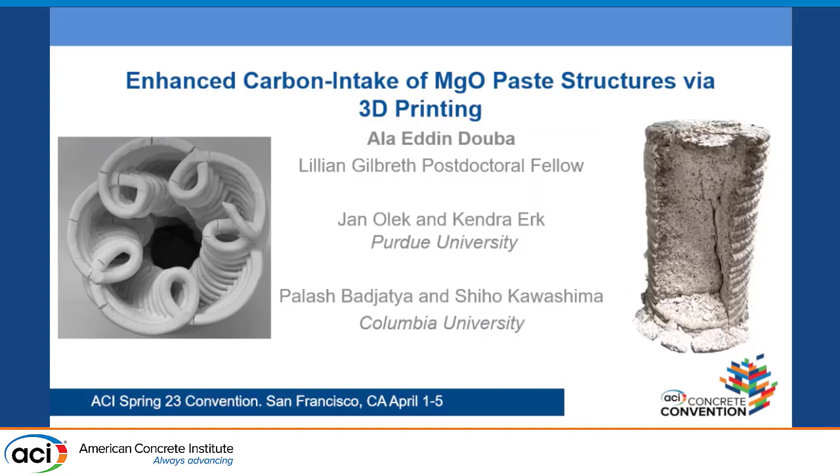So I'm presenting today some of my work at Columbia University. This is about enhancing carbon intake for magnesium oxide-based structures. Currently, I'm at Purdue University working with Dr. Kendra Erk and Dr. Olek. I just want to make sure that this is the work I did with Palash Badjatya and Shiho Kawashima.

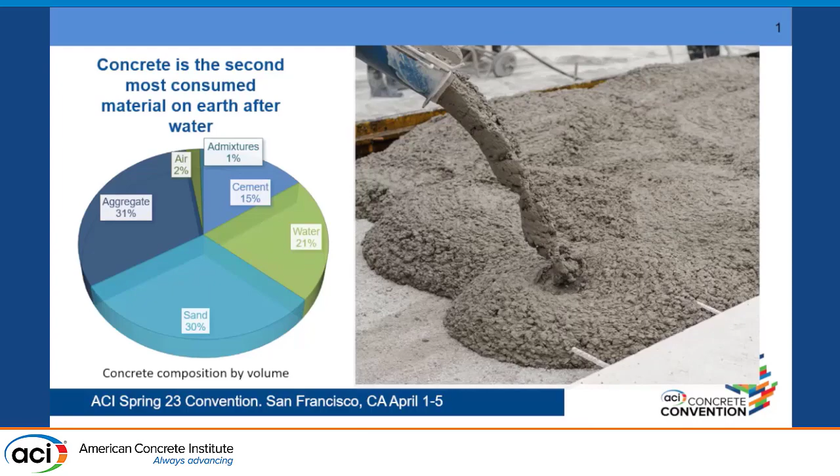So I think one of the reasons we're all here is because we know concrete is one of the most used materials on Earth after water, and because of it, it produces a lot of carbon dioxide. And if we actually dive deeper into where this carbon footprint of concrete comes from, we can see that almost the majority of it comes just from cement production. And of the cement production part, the main part comes from simply the decomposition of the carbonate phases inside cement.

And specifically, if you look at calcium carbonate, we would see that by itself, it's responsible for 33% of the CO2 emissions of concrete worldwide. And so if we are trying to reach the goal of carbon neutrality of concrete, we would have to at least put back all the carbon dioxide that we have produced by making our concrete. However, the best that we could do is put it back in and reach carbon neutrality.

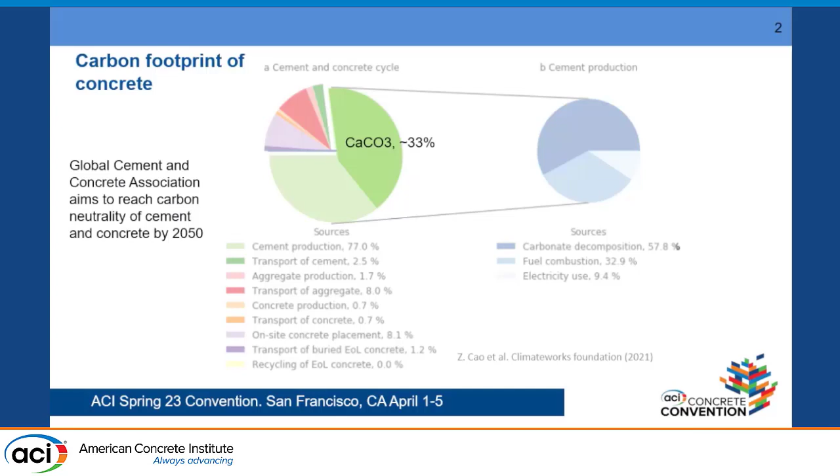So one of the questions that I wanted to answer is, can we go a step further? Can we start to talk about carbon negative concrete? And for that, we have to sort of forego the calcium base and look into another mineral. And that is where magnesia comes in. Now, magnesia or magnesium oxide is not novel. It's actually been used for 150 years at least. It's part of almost every cement batch. Typically, it's used at 1%, and in some large structures, we use it at 5%.

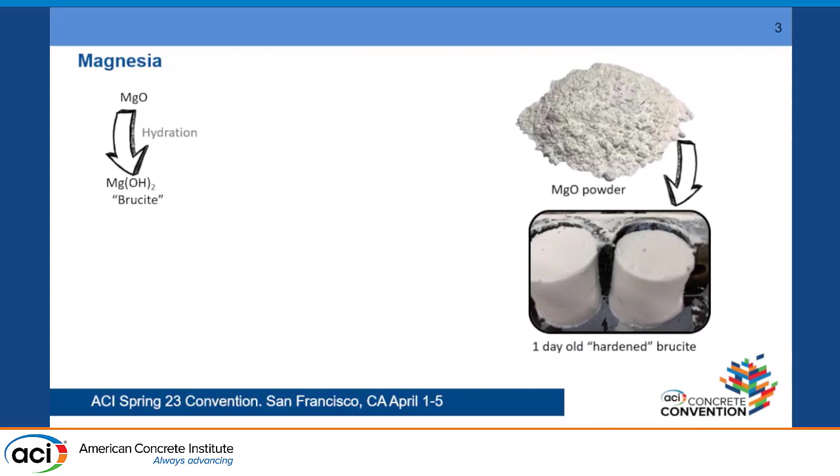However, we don't use it as the main binder, simply because it's weak. This is how it looks after you cast it for 1 day. This is technically hardened, and it can barely sustain its own weight. And this is typically why it's not used as the main binder. However, magnesium has a trick. Once it hydrates, it can actually carbonate. And when it's carbonated, it can gain a lot of physical strength. Now, the strength it gains when it's cast is still not high enough to use it as a construction material. But that's where the idea of using 3D printing comes from.

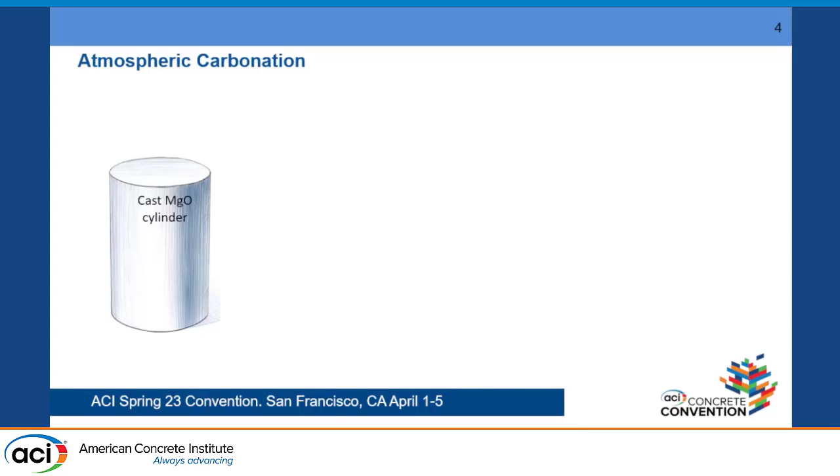So if we look at atmospheric carbonation of a cast specimen, we typically place it in a low pressure, high carbon content chamber, and that would start to carbonate the sample. But because carbonation is an outside-in process, which means carbon has to go from the outside of the specimen and penetrate through, we would not be able to fully carbonate it. So what we would end up with is a carbonated shell with an uncarbonated weak core, and that's why we see the low compressive strength.

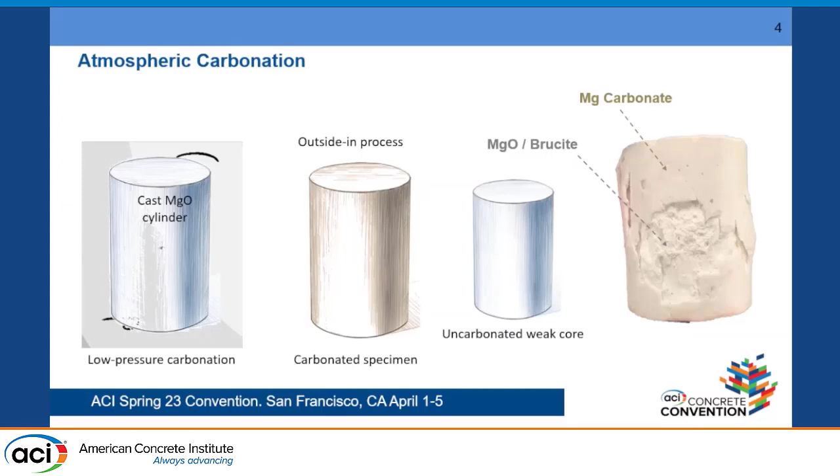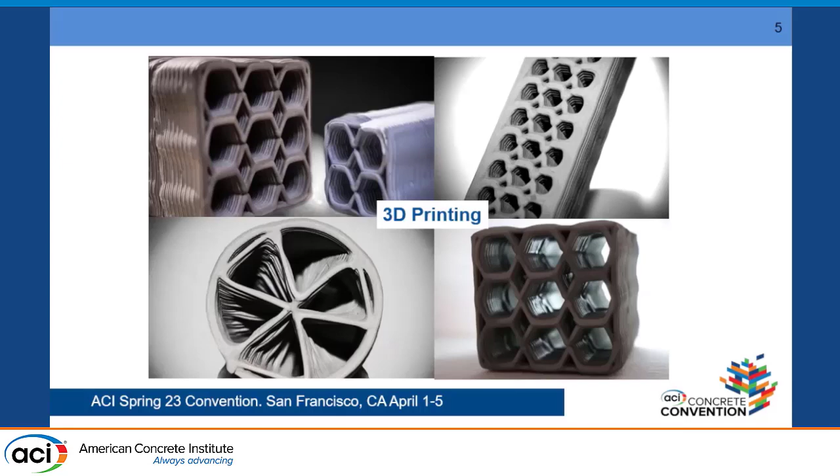So the benefit that 3D printing can give us is creating these delicate internal structures that allow us to create carbon delivery channels, increasing carbon penetration, and therefore maximizing the compressive strength. So that's the research that I did at Columbia. So to make this material printable, that's too weak to sustain its own weight even when it's hardened, I used a mixture of nanoclays and viscosity modifying admixtures.

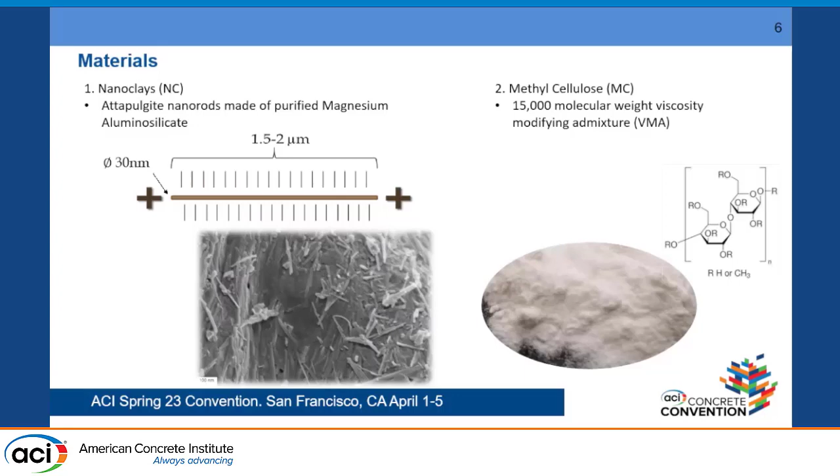Now, the nanoclays that I use are made of purified magnesium aluminosilicate. This is how they look. They're around 30 nanometers in diameter and 1.5 microns in length. And they typically come in very agglomerated states that we have to disperse, but they're very easy to disperse and very friendly to use on site. And then the second part is methylcellulose, which is just a viscosity modifying admixture. And I'll talk very quickly about why I use this combination.

Now, to characterize the rheology, I just relied on a typical vane and cup geometry. And the protocol that I use is very simple. The one note is I typically use a very long pre-shear. With 3D printed concrete, we reach very high structuration. In literature, we used to use rheology for self-compacting concrete, and that meant the pre-shear time required was 1 to 2 minutes. But when we are talking about thousands of pascals of static yield stress, that requires significantly higher pre-shear. And that's why I apply a very long one for 20 minutes.

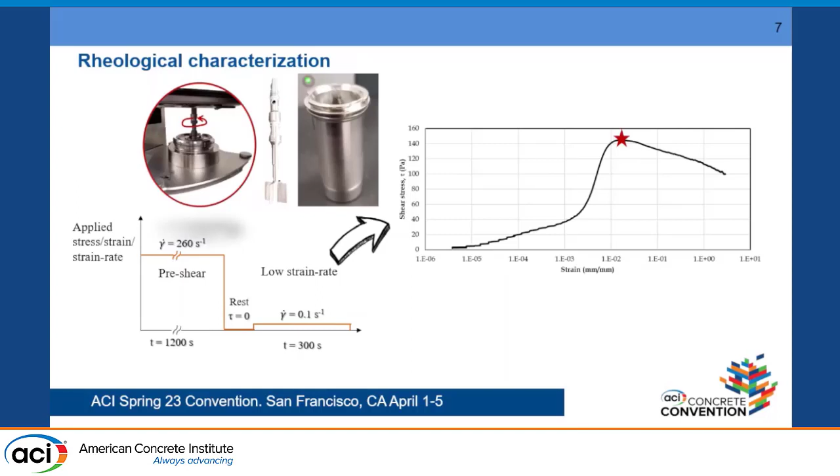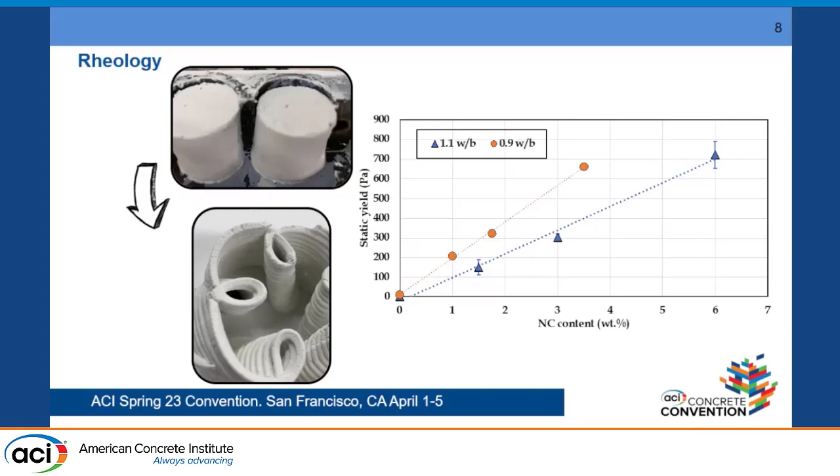And you can see here in the print that I made that the filament looks very dry. So this is a freshly printed specimen. However, the filament is so stiff that I'm extruding it as a solid rather than a liquid. And this is where we go from roughly 2 to 10 pascals to almost 800 pascals of static yield stress. So it's thousands of percent of increase in static yield stress. That's why it results in this phenomenon. So the second part is why I add the viscosity modifying admixture.

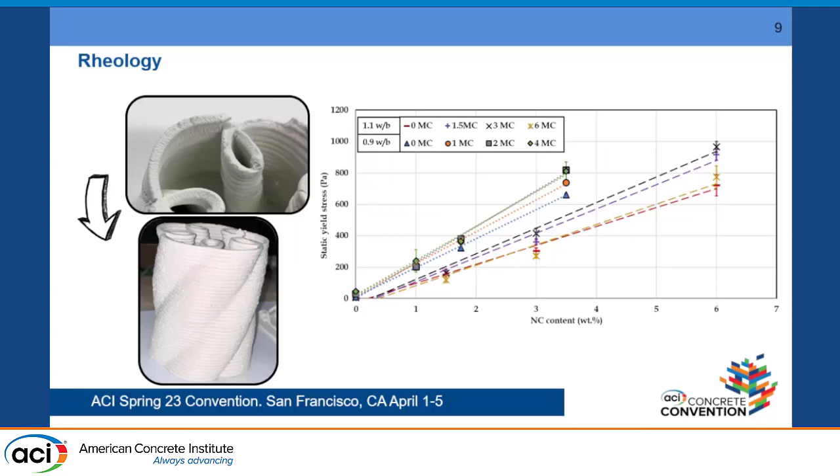So rheologically, if you look at the static yield stress, there's very little gains, and in some cases you would see detriment to adding something like a viscosity modifying admixture. However, what we would see in the realm of the 3D printing performance is instead of printing with a solid material, so when it's being extruded, I'm not extruding as a solid region, I actually can deposit it in a liquid form and then let it act as a solid afterwards. And that drops the stiffness of the material as it's being extruded, meaning I end up with better filaments.

So when I was able to 3D print the material, then I created an experimental program looking at 3 different infill patterns. This is a video of how the second infill pattern is being printed. You can see here 2 open internally structured infill patterns of small specimens, and then a third one which is closed, and this is meant to mimic a cast specimen, just to be able to isolate what are the changes happening because this material is being 3D printed.

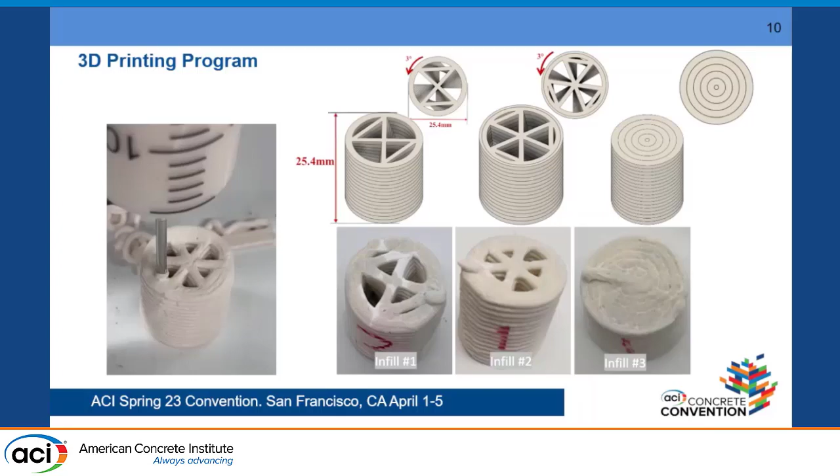So very quickly, we can look at the compressive strength results. So at 3 days of carbonation, so these are specimens that were cast or 3D printed, left for 1 day, then placed in a carbonation chamber to carbonate. At 3 days, we can see that all 3D printed specimens have significantly higher compressive strength. We're seeing increases from the cast specimen, and those are the carbonated ones, between 400 to 500% increase. And at 28 days strength, we see that we are still gaining a significant amount of strength.

Now, the water to binder ratio here is much higher than what you typically would expect with cement. And that's sort of what makes it rheologically more difficult to 3D print. But then we can see here that at 0.9 or 1.1 water to binder ratio, we are gaining a significant amount of strength. And in some cases, we can gain strength up to 50 megapascal, and that's quite sufficient to use this as a structural material to be able to build with it.

Now, what was interesting to me is that typically what we would expect with cement, as we increase the water to binder ratio, we would end up losing strength. And what I was finding here, which was strange to me, opposite to the early age, is that my mixes with the higher water to binder ratio were the ones with the higher strength. And the second part that was interesting is the samples with closed infill, so no internally hollow structures, were also keeping a similar strength to the open internal structure. And I expected them to be something similar to my cast specimens.

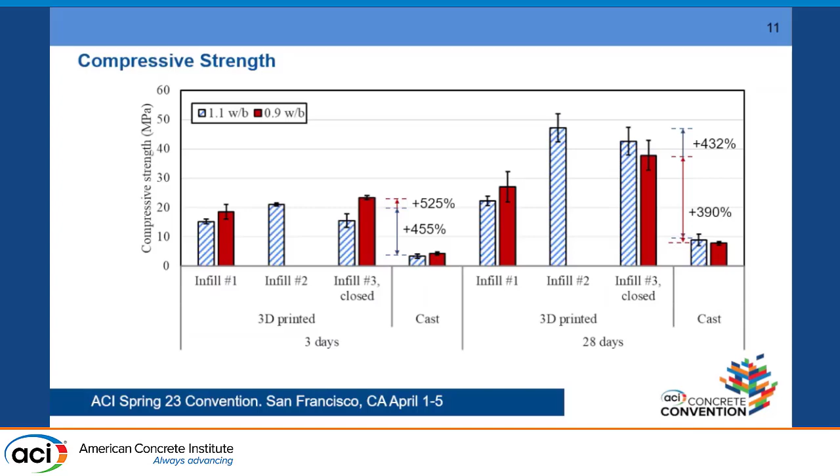And it was a bit of a head scratcher to understand why this was happening until we finally decided to look at the mass changes of these specimens, not only when they are carbonated, but even before that. So between 0 to 1 days, because my samples are not hardened, I did not move them, I waited for hardening. So within that first 1 day, my cast specimens are sitting inside their protective molds, so they're only exposed from the top for air evaporation. Whereas my 3D printed specimens have a much higher water evaporation.

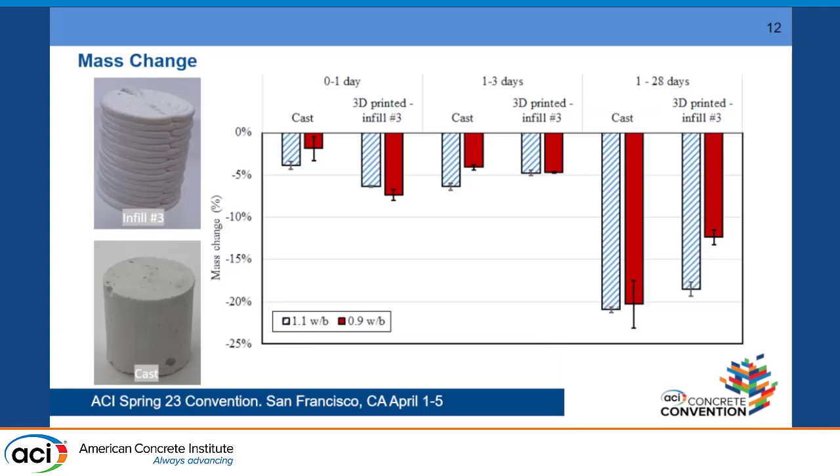Now, the benefit to this mechanically is also that magnesium oxide, after it's hydrated and carbonated, actually expands and increases in size. So all these pores are getting filled up with magnesium carbonate. So in fact, to be able to use the system, we'd rather increase its water evaporation, and that's where the mixture with the higher water to binder ratio, as you can see here with the 3D printed one, the one with the higher water, which means higher evaporation, meant higher carbon intake and meant higher compressive strength.

So with this, I can conclude the main summaries of my talk, which first of all is nanoclays were successful in increasing the structuration rate and enabling the 3D printing of this material. This is a very tough material to print. We can't rely on accelerated hardening like we would in typical Portland cement, simply because its strength when it's hydrated is still too weak. So in this case, the static yield stress is the one thing that's carrying all the 3D printing performance. And then when we can 3D print it, we can reach compressive strengths between 40 to 50 megapascal, which is sufficient to use it as a structural material.

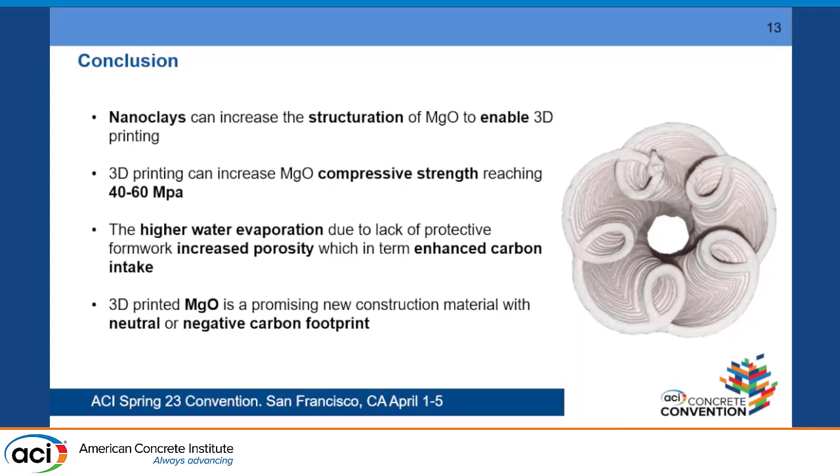And then, like I said, we are using the high water evaporation, and we are working on more research on how we can maximize this further and further. And lastly, this is one way we would be able to go back to a carbon negative concrete, and by finding ways to harvest magnesium oxide in carbon neutral ways, we now have a material that consumes carbon dioxide in order to gain compressive strength.